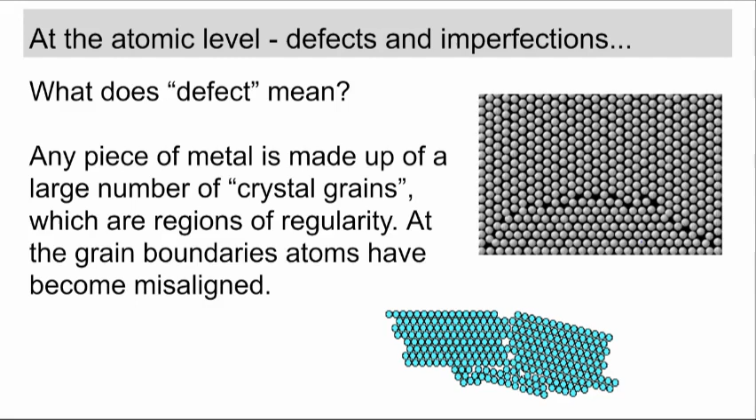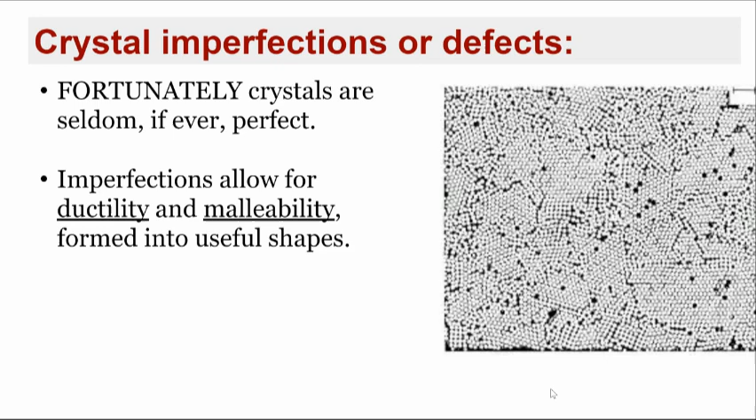Defects, though, in crystals are actually a good thing because imperfections allow for ductility, the ability of the metal to be stretched into a wire, and malleability, the ability of the metal to be flattened and formed into useful shapes.

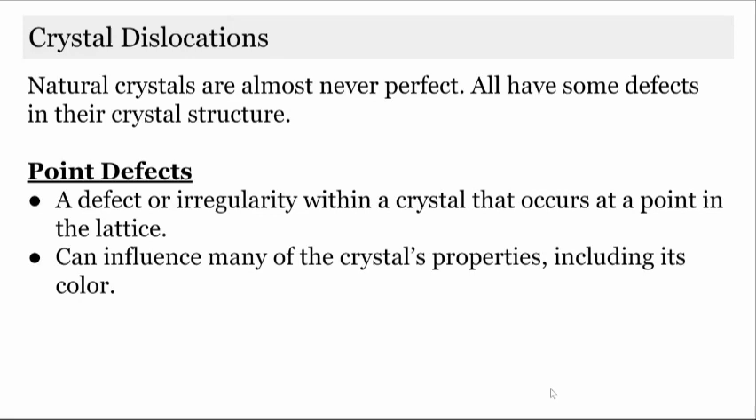So natural crystals are almost never perfect. All have some defects in their crystal structure. Today, we're going to start by examining point defects. Point defects are a defect or irregularity within a crystal that occurs at a point in the crystal lattice, which can influence the crystal's properties, including its color.

There are three types of point defects. The first one is called a vacancy defect. In a vacancy defect, atoms are missing from the lattice structure. We should expect an atom to be right here, and it's missing, so there's a gap in that region of regularity. We can clearly see these defects in our atomic model to the right, areas where we'd expect an atom to be, and those atoms are not present.

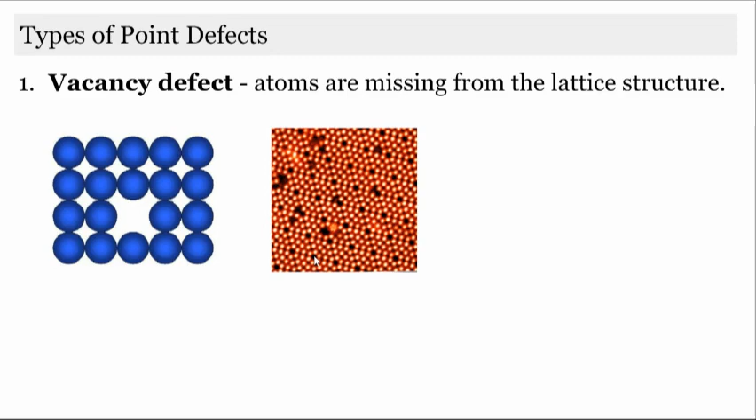A substitution defect is when different atoms have taken the place of existing atoms within the crystal structure. So we can see on our image below that our bulk atoms, most of the atoms in this crystal structure, are blue and represent one type of atom. And then we have this substitution, this orange atom, that's taken the place.

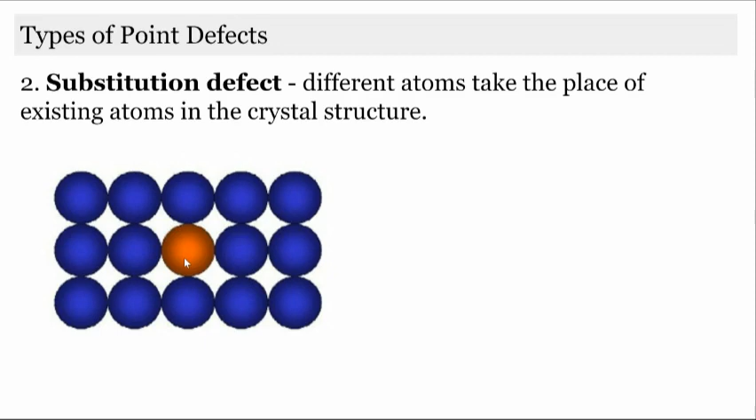Finally, the third type of point defect is an interstitial defect. That's when extra atoms are stuck where they don't belong. Generally, these extra atoms are much smaller than the bulk atoms, and they fit into some of the empty spaces. This is an interstitial alloy, and we can see the bulk atoms are the green atoms, and our extra atoms, stuck in places they don't belong in the crystal lattice, are the purple atoms in the picture.

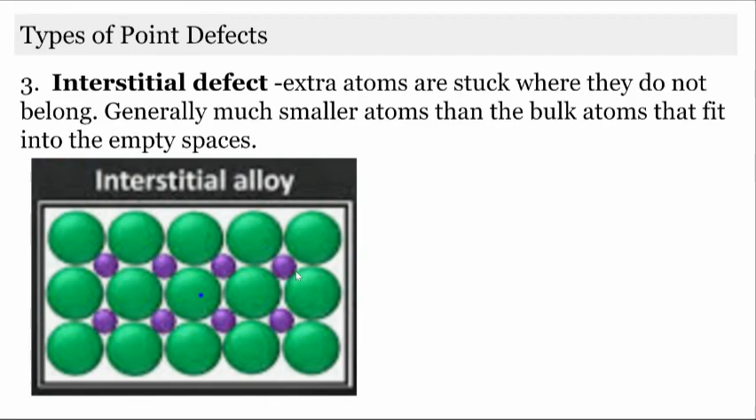Here's another way to see all three of those defects in one material. An interstitial defect, again, is an atom that's stuck in a place where it doesn't belong. In this model, our interstitial defect is an atom that is the same as the bulk atoms, just stuck in a place where it doesn't belong.

Whereas a substitution defect can be an atom that is smaller compared to the bulk atoms, substituted in the crystal lattice in a place where an atom should be. Or it could be a larger atom than the bulk atoms, but again, substituted in place of an existing atom within the crystal structure. And then a vacancy defect is when atoms are missing where they should be in the normal lattice structure.

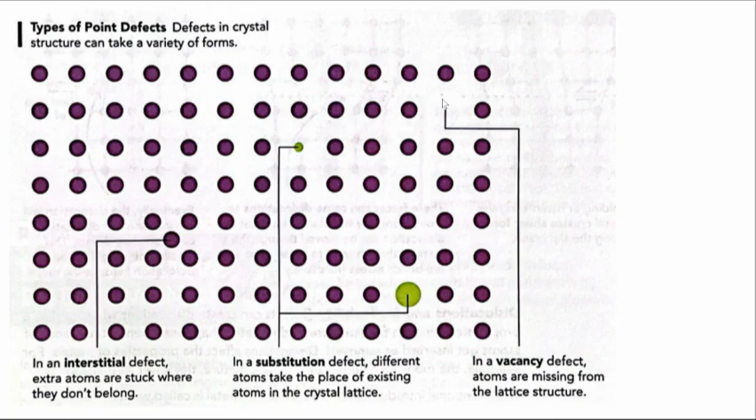But blue sapphires result from substitutions of titanium within the crystal lattice, as well as iron atoms. Green sapphires result from iron impurities being substituted into the crystal lattice, and chromium being substituted in forms red rubies. So when we have defects or substitutions within the crystal lattice of something besides aluminum and oxygen atoms, we get a different color gemstone.

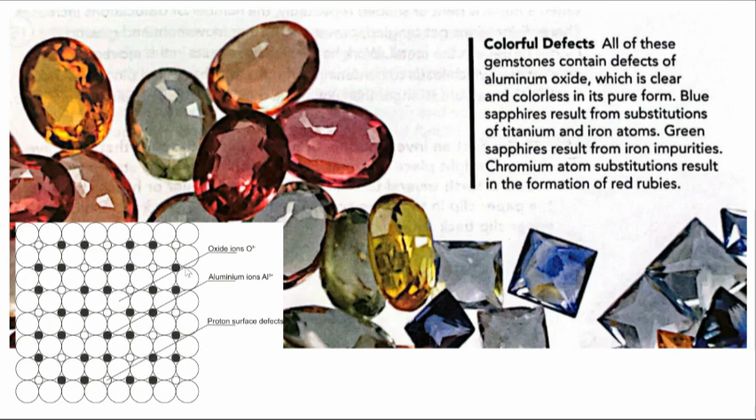So let's just do a quick check. Right now, what type of point defect do you see? Is this a vacancy, substitution, or interstitial defect?

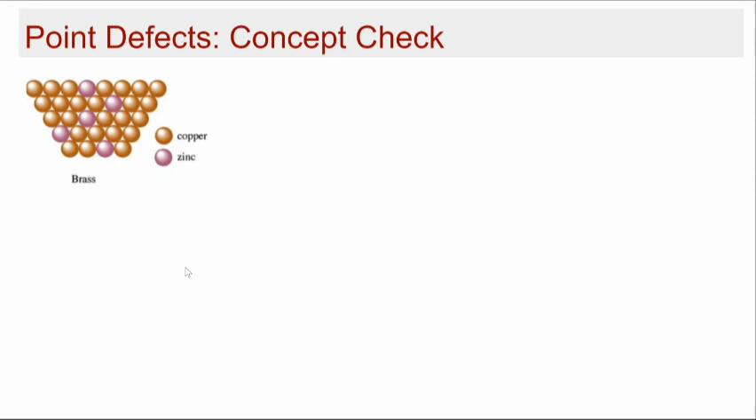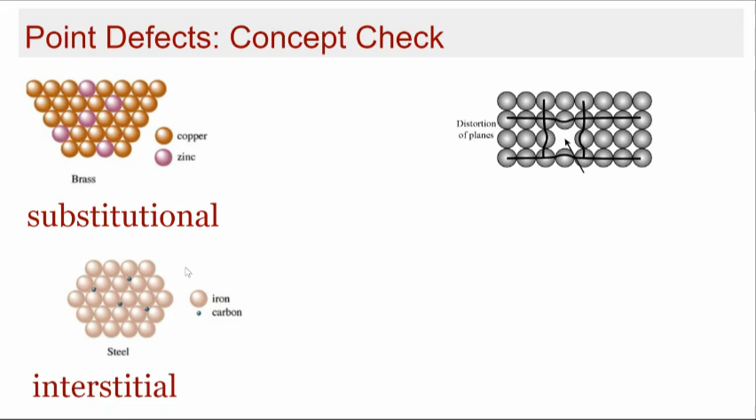Hopefully you said this one was substitutional. Agreed. What about this image? You should have chosen interstitial. And finally, this one's pretty obvious. Hopefully you said it was a vacancy defect.

All right, let's look at line defects. Line defects are lines in which whole rows of atoms in a solid are in irregular positions. This is also known as a dislocation.

If we recall what we were looking at a few classes ago, when we stretch our bonds significantly, we're going to have elastic deformation. And if those bonds are stretched until they break, that would be plastic deformation. Obviously, line defects have a significant effect on the mechanical properties of the material.

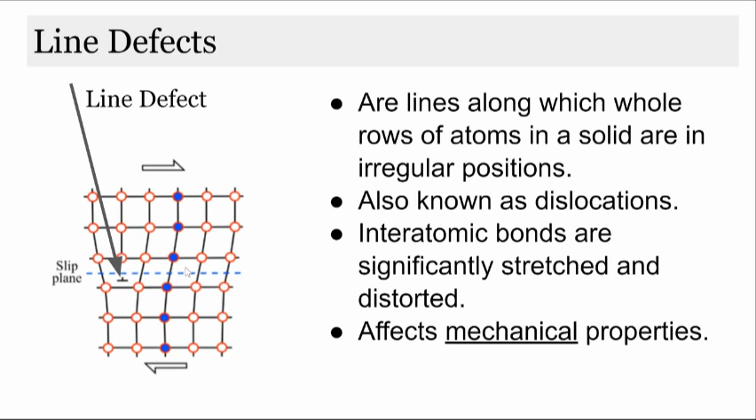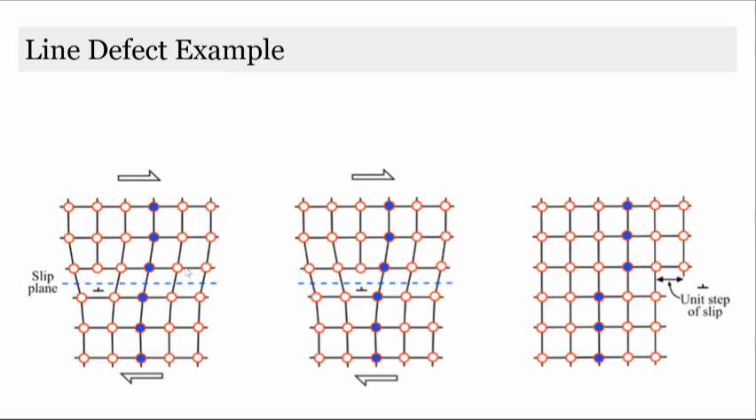So we can see the line defect right here in the picture because this is where an entire row of atoms is missing and it's not in its regular position within the crystal lattice. And we can see if there is a force applied, that line defect can move and slide along the crystal lattice until eventually it reaches the edge.

And this is known as an edge dislocation. Let's show an animated visual of that. So that line defect is being moved along until it reaches the edge of the crystal lattice, and that becomes an edge dislocation.

So an edge dislocation is when a plane of atoms is inserted into a plane in the crystal structure. We're going to watch a quick video about this because it's an excellent example that walks through an edge dislocation and its effect on some mechanical properties.

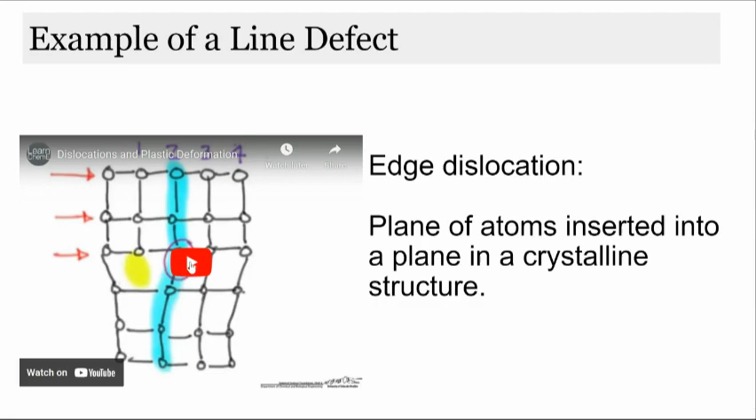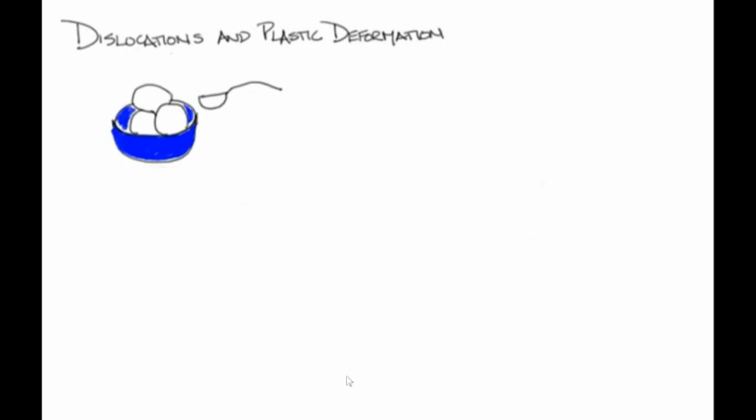The purpose of this screencast is to discuss the concept of dislocation and plastic deformation. So let's say that you have a bowl of cold ice cream and a spoon. If you go ahead and take a bite out of the ice cream and you put your spoon in the ice cream and it bends, but it does not go back to its original shape, what you have just observed at the macroscopic level is a large number of dislocations moving. Another way that we end up describing this is plastic deformation.

So let's go ahead and take a look at what a dislocation is. If we have a metal that is solidifying, we're going to expect that during solidification, it will actually end up forming for us a lattice. So sometimes the lattice that ends up forming has a defect in it. And these defects are what we call dislocations.

So if our defect is a situation where we end up having part of the plane not forming, we end up calling this an edge dislocation. And you can see how our lattice has a missing atom. So in yellow is where our missing atom is. This becomes a problem if we end up having a situation like our spoon with our ice cream.

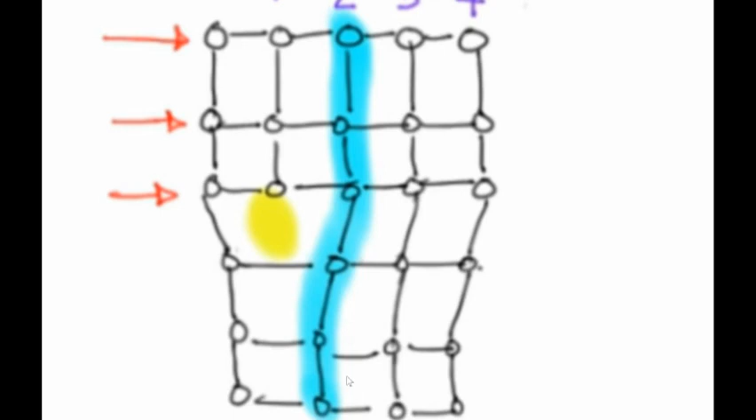So if we go ahead and we place a force on the side, and this would be similar to if we went ahead and dug that spoon deep into that ice cream, what we'll end up finding is that our bonds along plane 2, right along this plane, they start to stretch on us, and then they'll eventually break. And once they end up breaking, we end up having a situation where right at this point, you will find that these bonds are going to actually end up breaking and reforming.

Allowing us then to have plane number one will end up having a full plane. The result is that your defect in your material in your lattice is now moved. It's no longer along plane one, but instead it's along plane two.

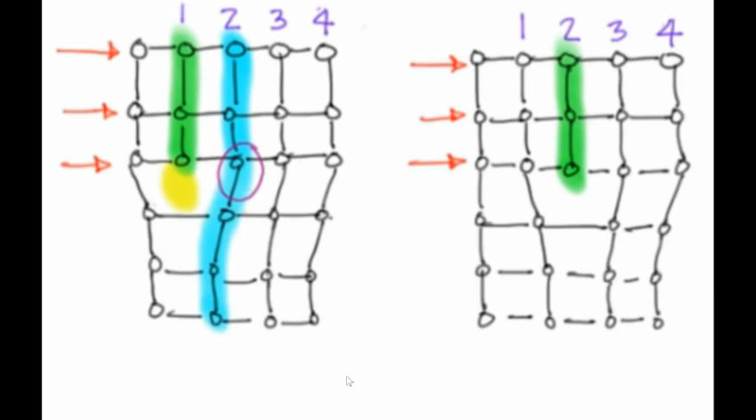If we keep applying our shear force, what's going to end up happening is our dislocation is going to keep moving. So our defect will keep moving all the way to the end. So then we're going to have a situation where our final lattice will end up looking like this. In this case, our edge dislocation has moved all the way to the end, so now it's in plane 4.

One of the things that's really good to remember, though, is that what you're seeing here is a single dislocation moving. This was all we had in this example. However, anytime we see plastic deformation of a metal, we are seeing several dislocations, large numbers moving all at once.

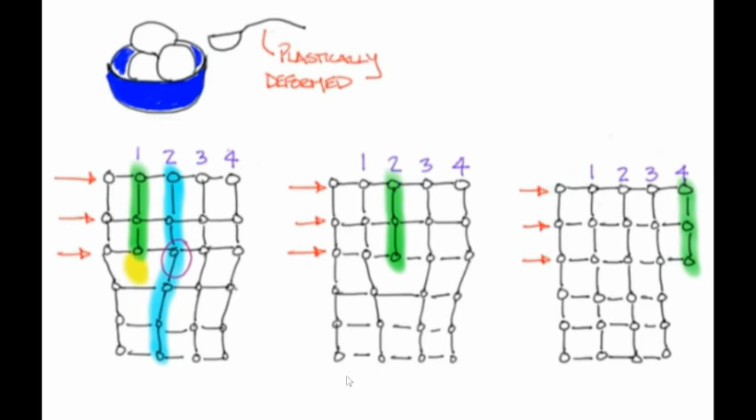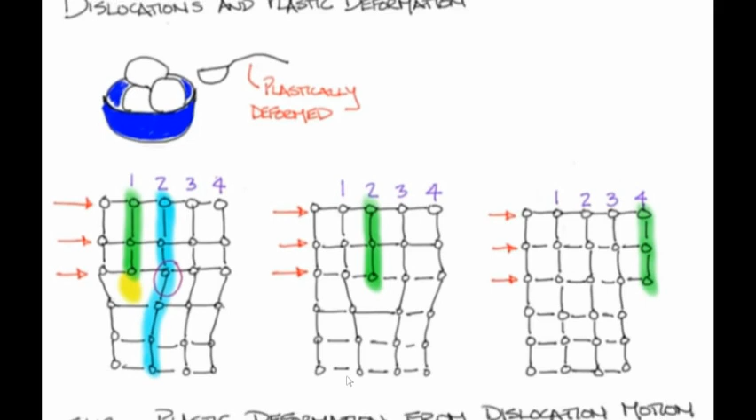So a little bit different than the example that we have here. The definition of slip is plastic deformation produced by dislocation motion.

Another concept associated with dislocations is dislocation density. As our materials solidify, we end up having different types of dislocation densities associated with that metal. Dislocation density is defined as total dislocation length per unit volume.

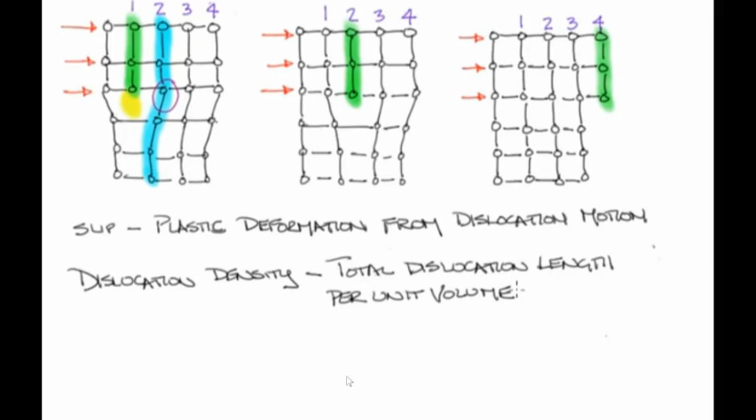Different types of processing actually increase our dislocation density. For instance, processes that can increase dislocation density include cold rolling and cold forging. In these cases, we're assuming that our material is below its recrystallization temperature. So cold rolling and cold forging are examples of processes below recrystallization.

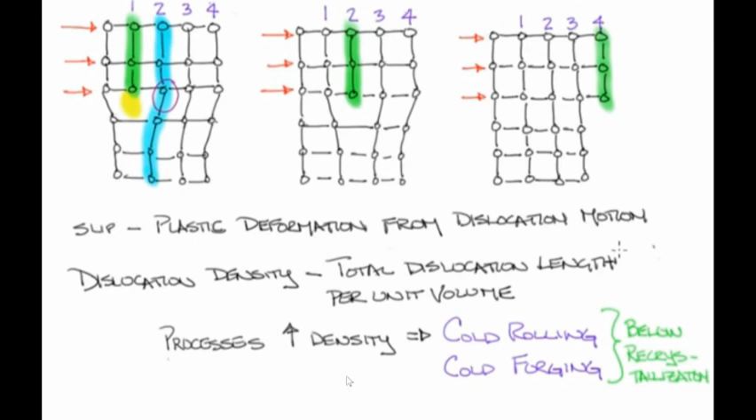So just remember, the next time you end up permanently deforming a metal, what you have actually done is a large amount of dislocation motion.

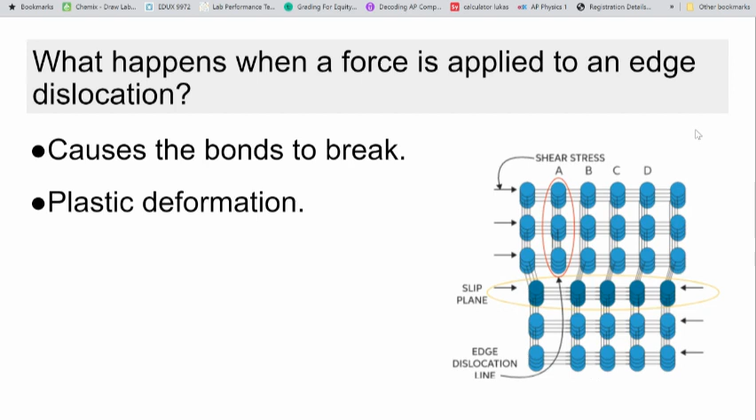So what happens when a force is applied to an edge dislocation? The answer is it causes the bonds to break, and once the bonds break, we become plastically deformed. That means we can't return to our original shape of the material.

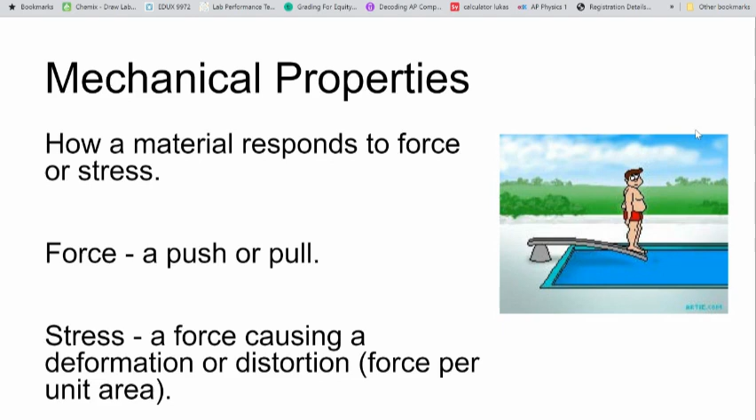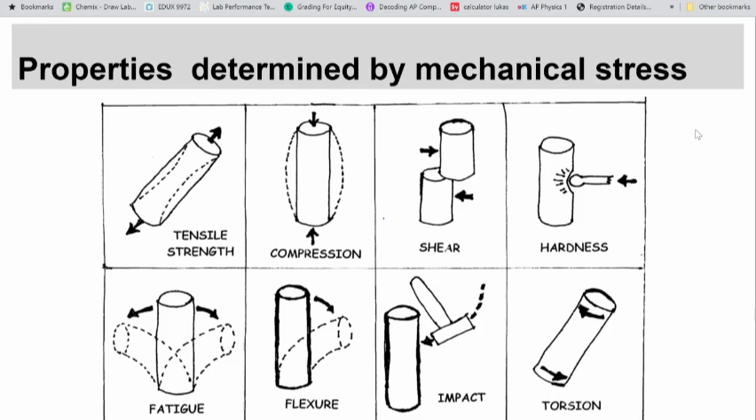Defects, both point and line, change the mechanical properties of a material, or how a material responds to force or stress. Properties that can be determined by mechanical stress include tensile strength, compression, hardness, fatigue (the lifespan of the material, or how long it can stay intact over time), as well as impact and torsion.

So let's look at an example of a tensile test, a way to test a mechanical property of a material.

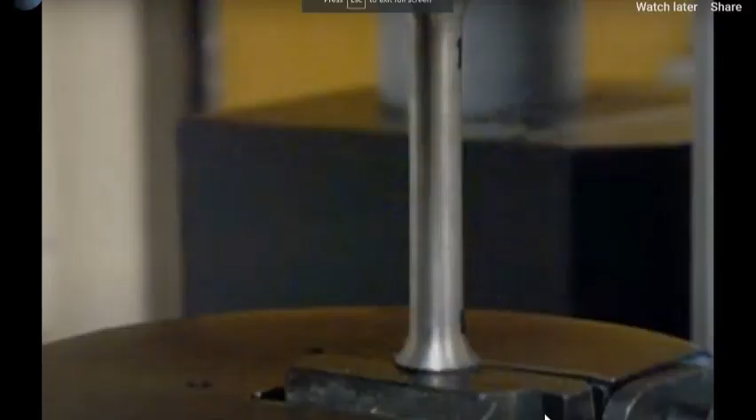Hopefully you can start to see some necking, an area where that metal is being plastically deformed. Ooh, and we had a brittle fracture.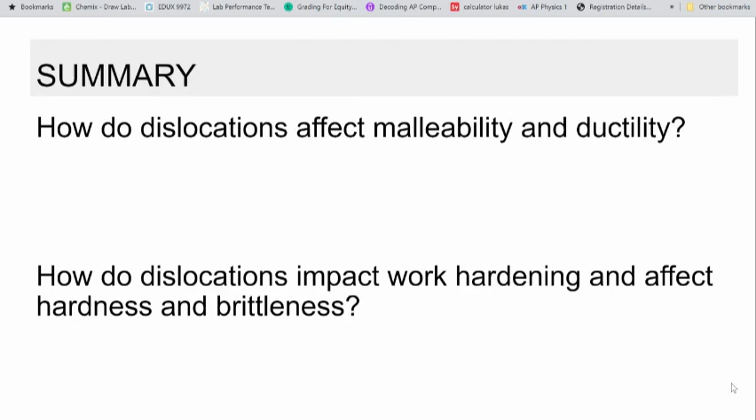So how do dislocations affect malleability and ductility, and how do they impact work hardening and affect hardness and brittleness? Dislocations increase malleability and ductility because there's empty space for the atoms to move to. The more dislocations present, the more malleable and ductile your material will be.

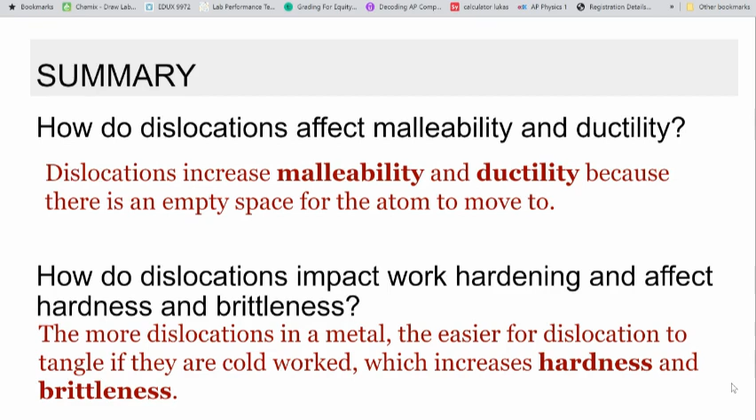How do dislocations impact work hardening and affect hardness and brittleness? The more dislocations there are in a metal, the easier it is for them to tangle if cold worked below the recrystallization temperature, and that would increase both hardness and brittleness. That's the example we saw in the video regarding ice cream.

So when we look at how you change the properties of a metal, as a material scientist we have four approaches. We can make it from different stuff, thinking about our material selection. We can add different stuff to it, in other words create an alloy.

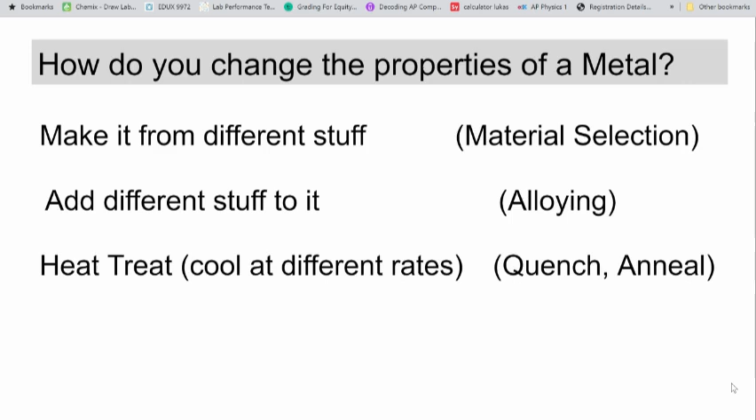We can heat treat it and cool it at different rates, quench or anneal it. This will change how many defects are present in the material, how the atoms are aligned within the crystal lattice. Or we can disrupt the crystal structure by work hardening or cold forging something.

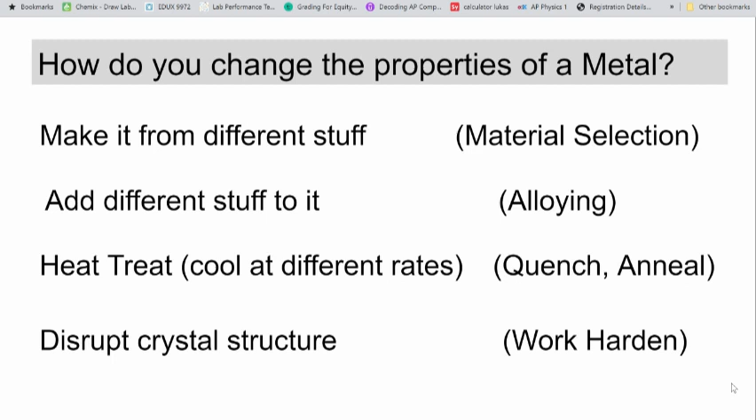The BB case activity we did in class looked at that example of quenching or annealing, changing the rate at which we cool a substance. Let's watch a quick video to show you what you should have seen in that activity.

At the atomic level, as the metal is heated, the metal atoms move more freely, and during gradual cooling, the atoms slow down and settle back into a very orderly array with few defects. So when our material was cooled gradually, the atoms have plenty of time to find their proper positions within the structure, and there are less defects present.

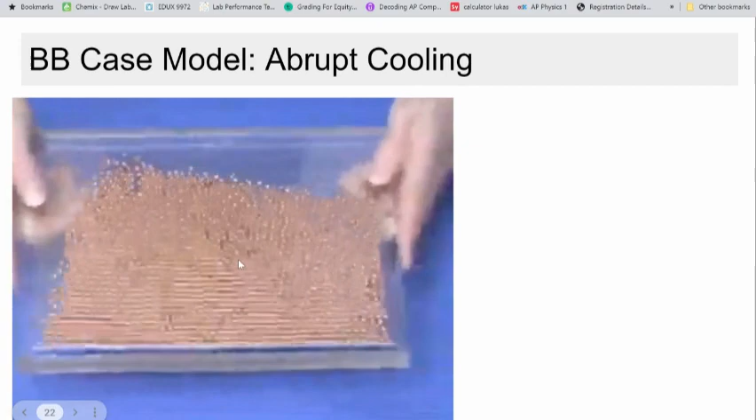Let's compare that to if we abruptly cool our substance. At the atomic level, as the metal is heated, the atoms move more freely, but the abrupt cooling process leaves many defects in the crystal structure.

So the faster we cool our material, the atoms have less time to get into their locations within the crystal lattice, and we get more defects. That will change the mechanical properties of the material.

So let's take a second and look at the brassing a penny lab we did. We started with our original copper-plated penny. We then plated it in zinc before eventually turning it into a brass penny in the lab.

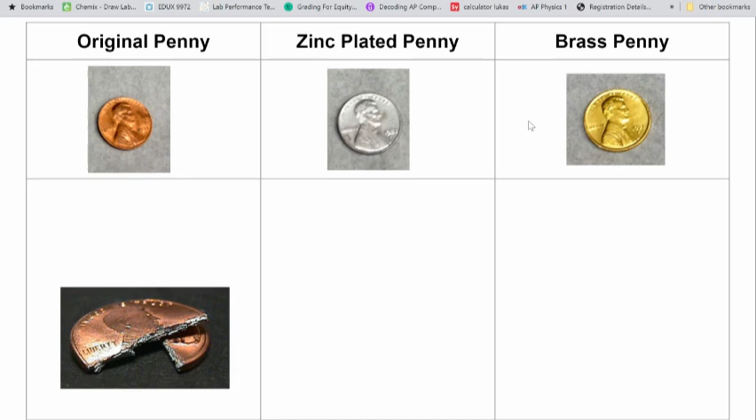If we consider our original penny, if we cut a penny in half, we know that it is made of mostly zinc with a small, thin layer of copper around the penny. If we were going to draw an atomic view picture of that, we would be drawing a picture that shows

mostly zinc atoms in the middle with a thin layer of copper atoms around the surface of the penny. When we put the penny into our hydroxide solution that had zinc inside of it and used electricity to plate it, we essentially added another layer of zinc, another very thin layer of zinc around the outside of the penny, coating it in zinc. So just like the original zinc was coated in a thin layer of copper, now we've added just one more layer to the penny, and it is zinc colored on the outside because we've created another thin layer of zinc around the outside of the penny.

But then we put it on a hot plate and we heated it up. And when we took it off the hot plate and put it in water and quenched it, we ended up with this brass penny. What would that look like on the atomic level? Why did we add it to the hot plate? How did the atoms in this shift as we put it on the hot plate?

Hopefully you drew an atomic model that showed the copper and the zinc atoms now moving and changing positions and being mixed together within the penny.

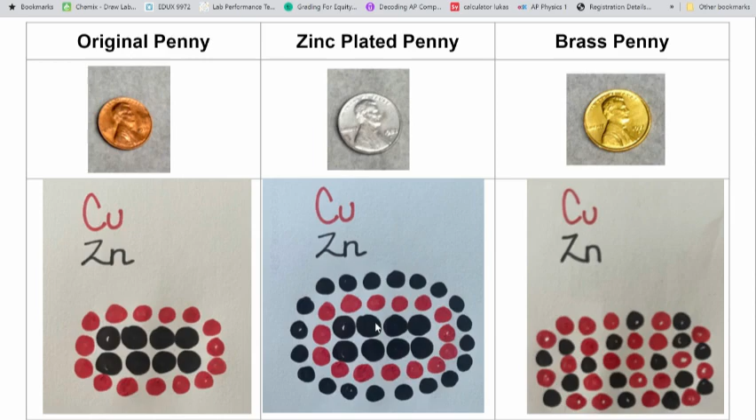If we think about what happens, brass is a homogeneous mixture and it's a substitutional alloy. The copper and zinc atoms are substituting and taking each other's respective places within the crystal lattice. The heat from the hot plate causes atoms to gain energy. They become mobile enough to diffuse and mix and become part of each other's crystal structure.

This is known as solid-state diffusion. It occurs due to vacancies in the crystal structure. We need those vacancy defects because two atoms cannot exist in the same space. So for diffusion to occur, there must be some empty spaces.

This is akin to one of those slot games you play as a child where you're trying to move and organize your pieces to match whatever image was that was rolled. And so there have to be vacancies, empty spaces, so that the copper and zinc atoms, when heated, are mobile enough to move and fill in those spaces and to mix together.

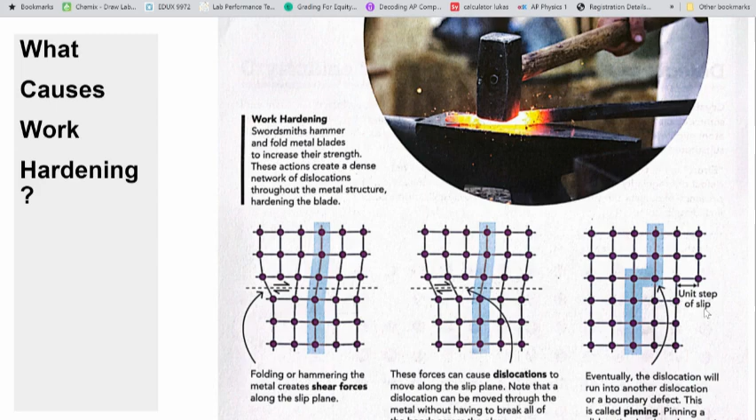The atoms have nowhere else to go, and so they are pinned or stuck. And this pinning is creating the hardened effect because the atoms are now stuck into position and tangled. So the metal is now work hardened or significantly harder than it was when it was over here.

If you have a pure piece of metal, you can control the size of the grains by heat treating or working the metal. Banging the metal around when it's cold tends to create the tangle dislocations, increasing the hardness and brittleness. And in order to get it back to being workable, you would need to reheat it so that the atoms could move in their crystal structure back, removing the pinning and work hardening process.

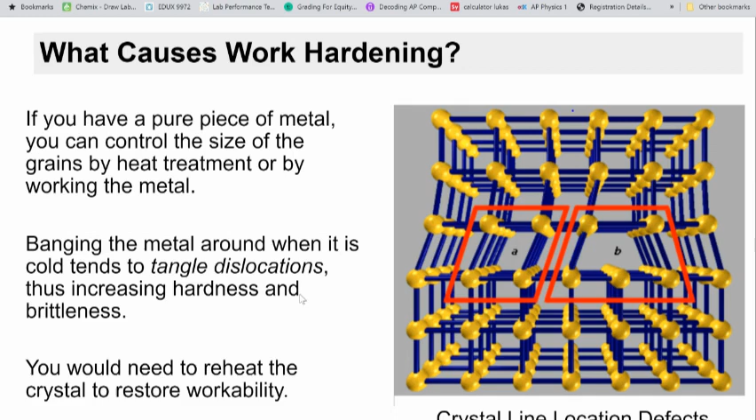So one last thing that we want to summarize. How would each type of defect that we studied affect the thermal conductivity? And remember that thermal conductivity is the ability of electrons to carry energy in the form of heat. And so what we're really looking at is how mobile the electrons can be through the material.

Electrons in the metal move around. They are conducting heat more easily than they can through ionic solids or covalent network solids.

So if we consider our three types of defects, vacancy, interstitial, and substitutional, which one of those would have the largest effect on thermal conductivity?

Hopefully you told me vacancy would, because a vacancy defect provides irregular spacing, so that's going to have the biggest change, the biggest decrease in conductivity.

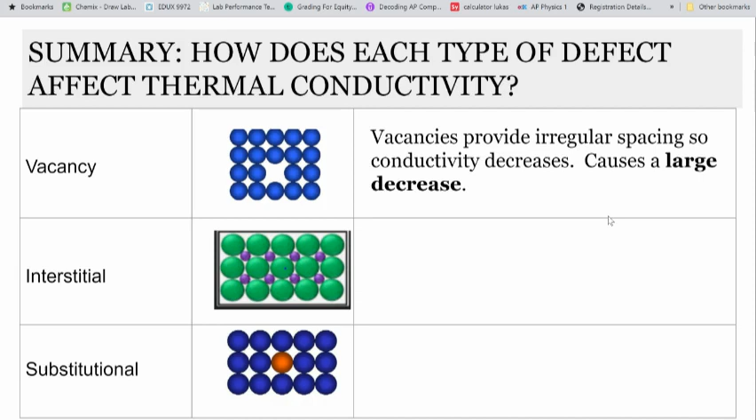Whereas interstitial, those impurities affect the regular atomic spacing and thus the flow of electrons, but it will have a smaller impact on the thermal conductivity than a vacancy defect would. Whereas substitutional has the smallest decrease in thermal conductivity because it has the lowest effect on spacing and thus the mobility and the flow of electrons.